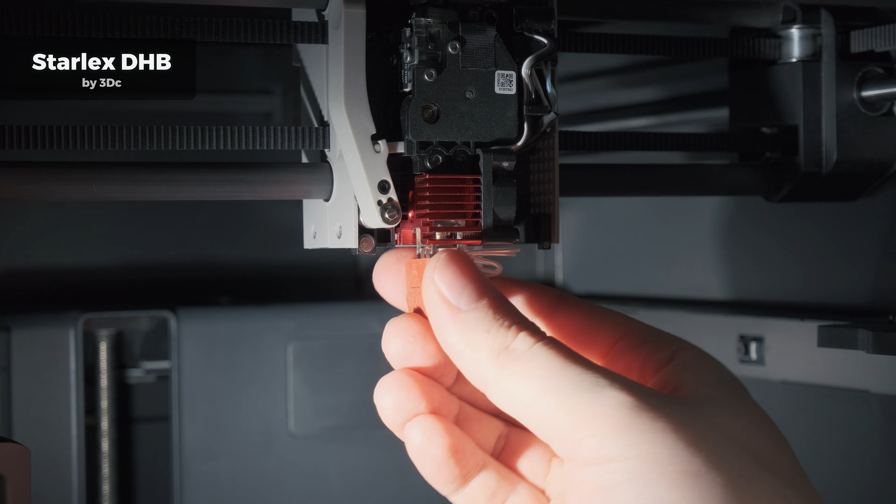Hot end designs for Bambu Lab X1 and P1 printers are getting absolutely ridiculous. They range from looking almost the same as the original but performing leaps and bounds better, to dual heaters and thin tubes that act as nozzles. The variety of engineering is truly spectacular.

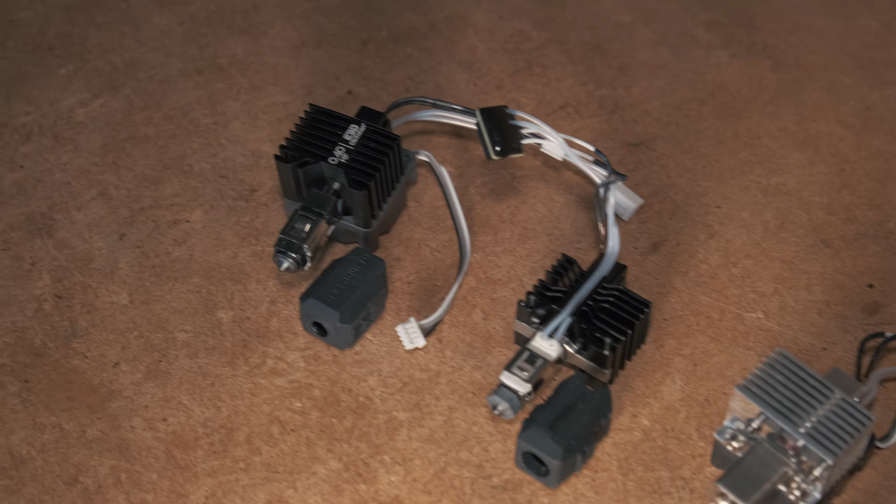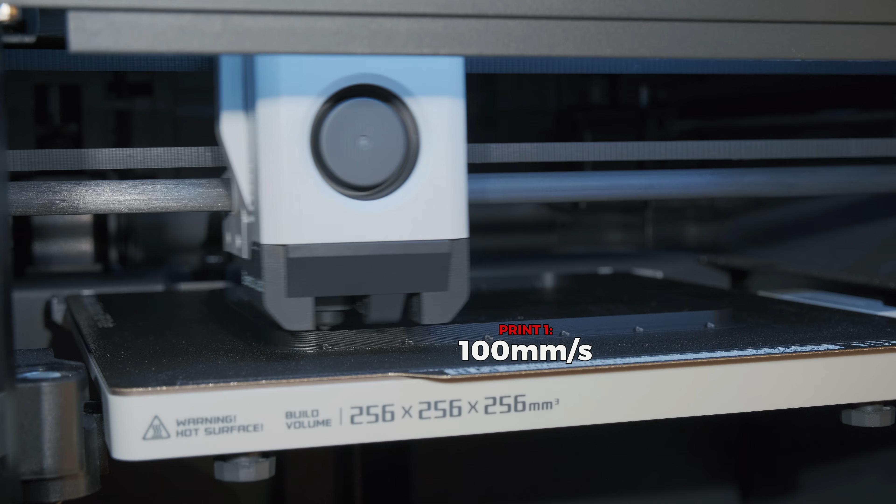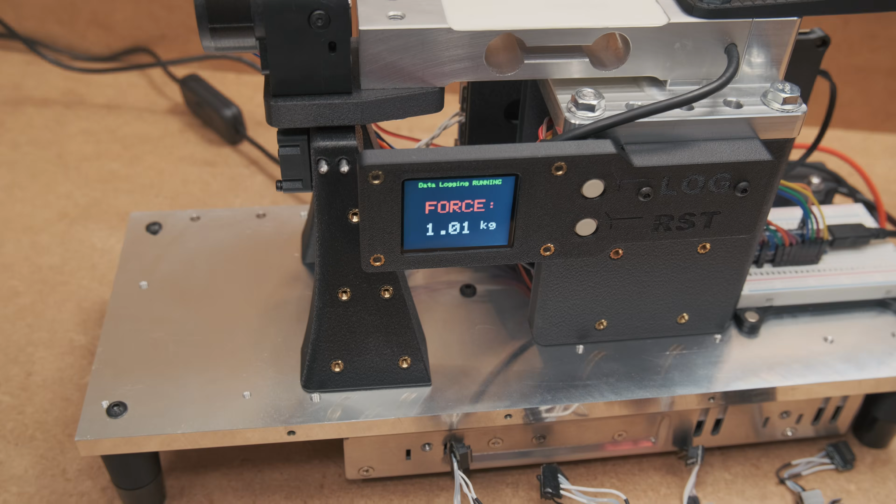The only question is, how well does each design perform for the main purpose of melting the filament? The proper way to determine that is not just by seeing if filament can be extruded, but rather by printing at increasing speeds and ripping samples apart to know how good the actual adhesion is. But this time I will go even deeper by additionally testing how much force each hot end needs to extrude the filament at those same printing speeds. There are so many fascinating things to look at and talk about, so let's dive straight into the good stuff.

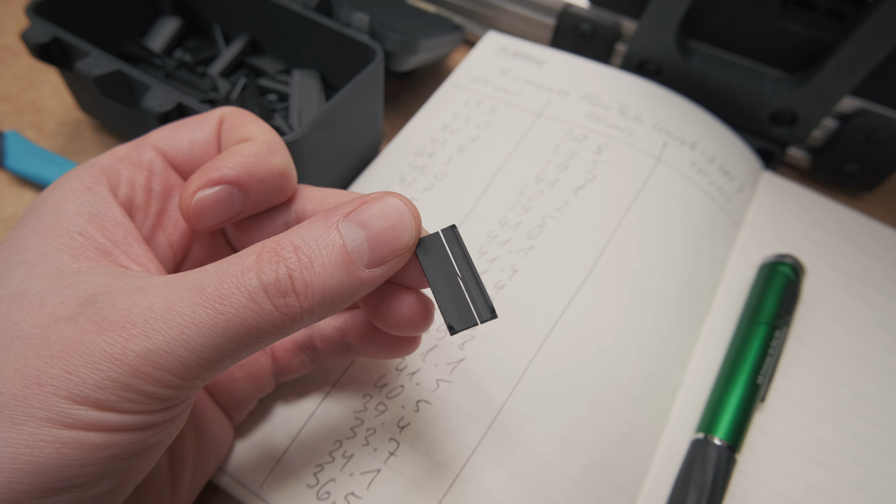We have so many hot end choices for P1 and X1 printers, but we get overwhelmed when trying to compare them. That is why I love this video series. It immensely helps us make a decision based on actual testing data. But it also creates a little competition between companies on who can engineer the best performing hot end when limited to this tiny form factor.

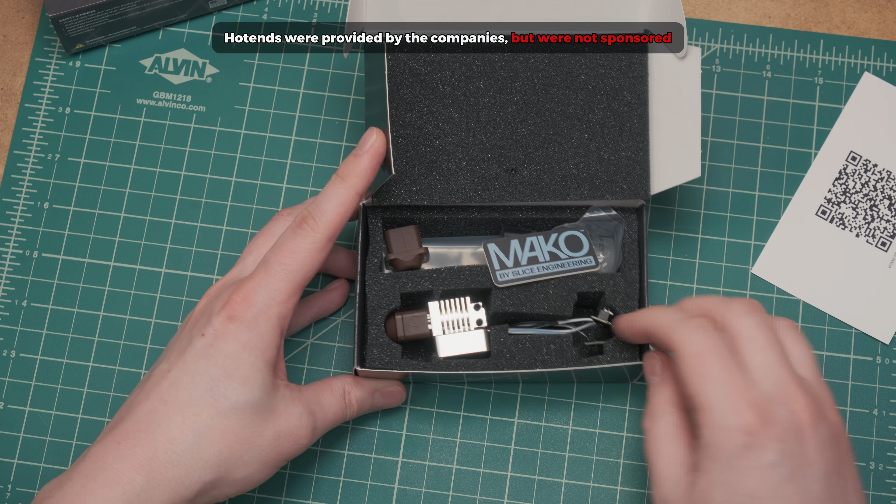We have a long-awaited Slice Engineering Mako, a very unique 3DC Starlex DHB, Micro Swiss's FlowTech, and the Phaetus Conch M6. Phaetus also released Conch hot ends for A1 series printers, but due to the sheer volume of testing needed, I had to exclude them from this video.

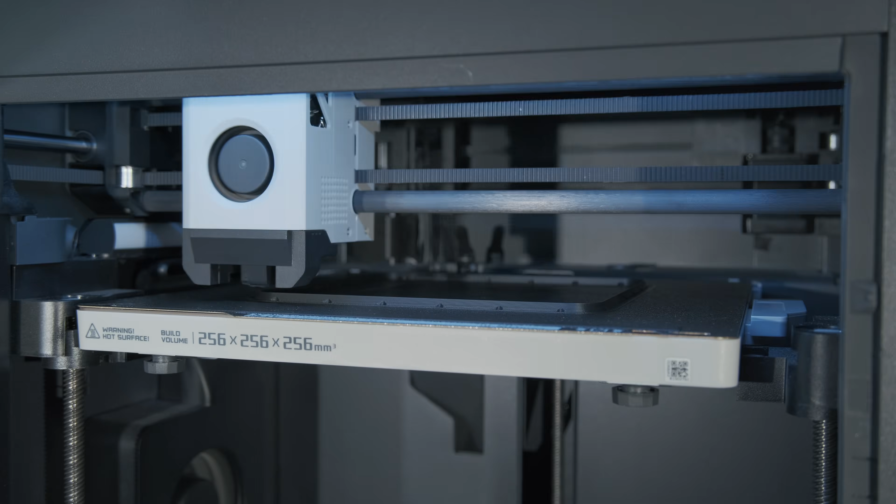It is important to establish a starting comparison point, so here is the stock Bambu Labs hot end's performance and the best performing hot end so far, the A4D High Flow ObXidian.

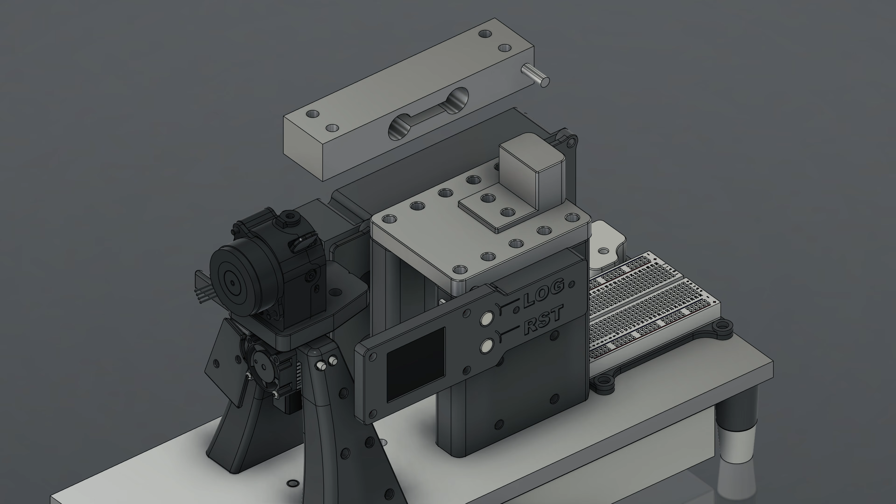Meanwhile, to additionally provide the extrusion force results, I had to build a custom testing machine. I won't go too deep into the details when making it, but the main goal is rigidity. That is why I designed and ordered a custom load cell bracket that was CNC'd from aluminum by today's video sponsor, PCBWay. Its main purpose is to spread the load from a smaller concentrated area to a bigger one that can be further printed.

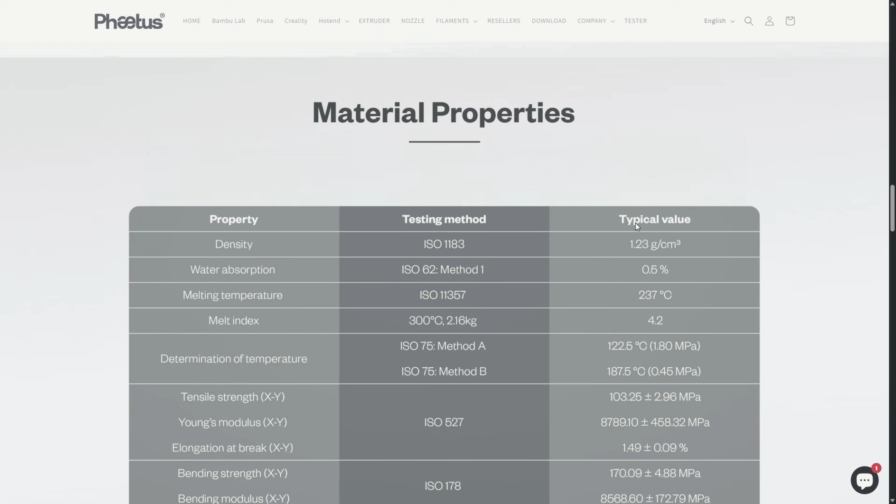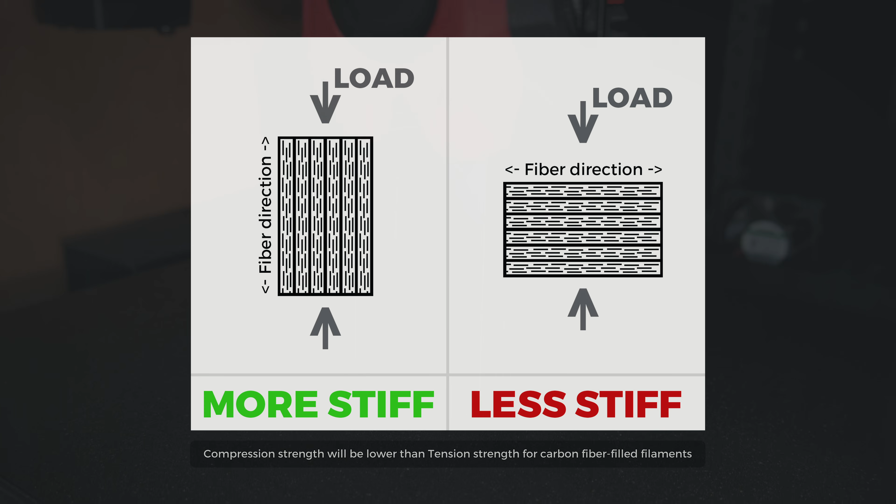For the parts, I chose Phaetus NextPA carbon fiber filled filament. It is based on PPA material, which offers incredible stiffness, and this one is also co-extruded, which should provide even more advantages. However, the key point is to orient your prints correctly, because that gives more than double the stiffness when fibers are aligned to the load direction.

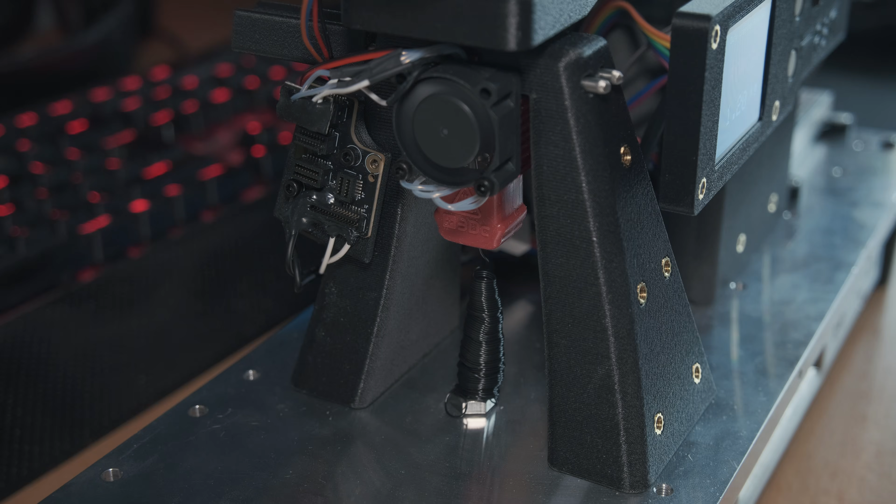The lower extrusion force is always better, as there will be less wear and tear on the extruder itself and less stress and deformation on the filament. Plus, for flexibles like TPU, having a hot end with low extrusion force technically means that you should be able to print it faster. So with all this out of the way, let's finally check the new hot ends.

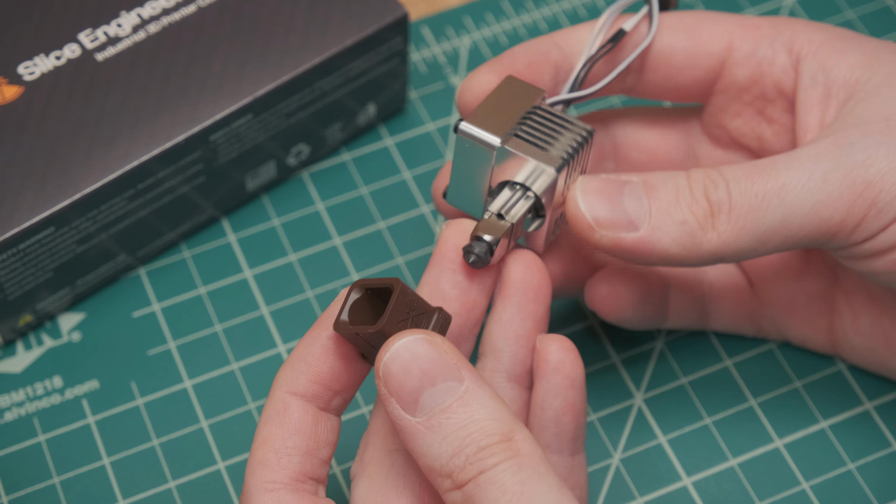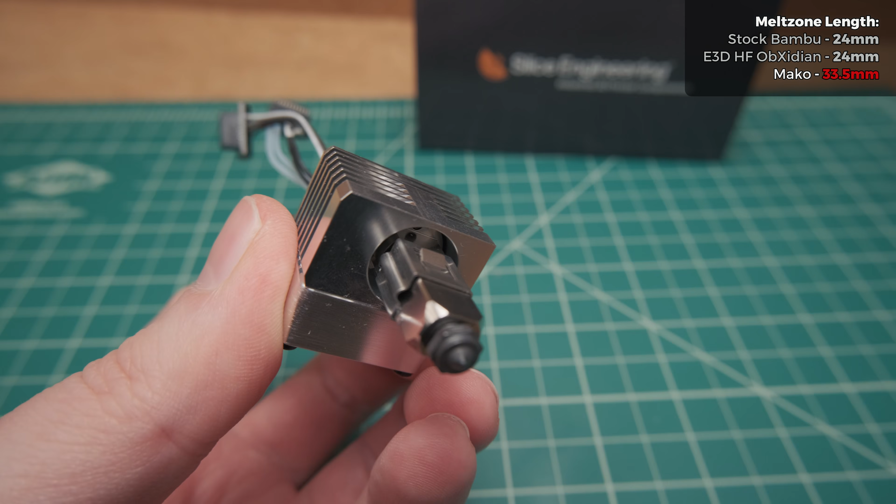First, the one we waited for quite a while, Mako with Gamma Master nozzle. The main thing that makes it visually stand out from the rest is the fan frame made from aluminum. That raises a question: why would we need one? My best explanation would be because this hot end has a long melt zone and it goes deep inside the heatsink with no thermal insulation or airflow from the fan.

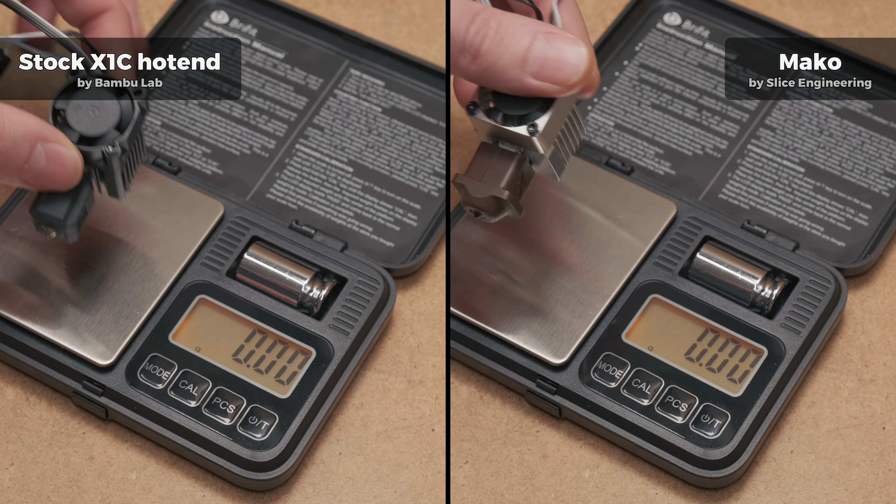The heatsink must dissipate way more heat, so basically the fan acts as an additional heatsink. It also adds up a significant amount of weight, and the Mako hot end ends up the heaviest I have tested so far. Plus, the fan makes quite a noticeable high-pitched noise, unlike the stock Bambu fan.

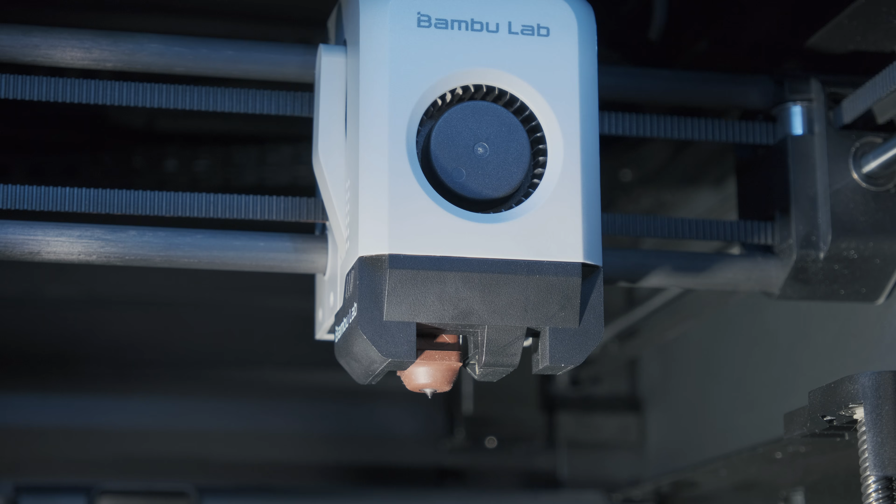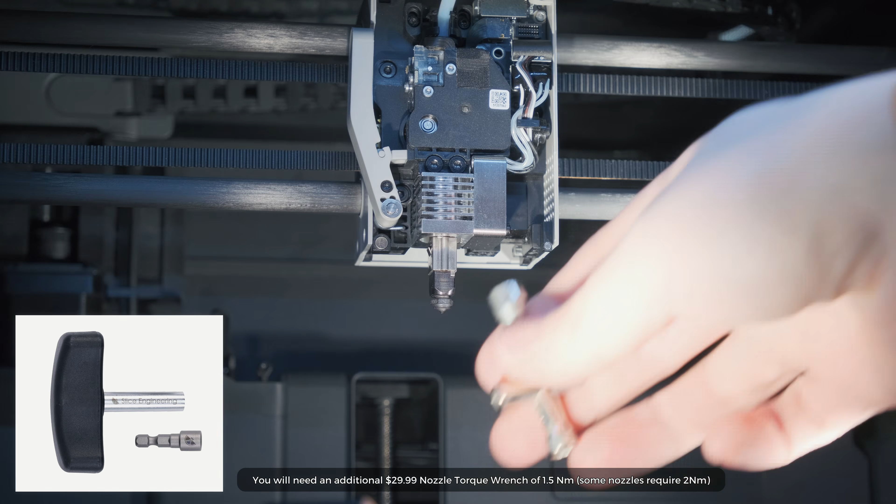Looking at the adhesion performance, I can say that it is very good compared to the stock Bambu hot end. It still falls short of the High Flow ObXidian, but the Mako hot end doesn't use CHT design on this nozzle, and nozzles are replaceable. Plus, it has hands down the most convenient and satisfying sock design that I have used so far.

However, having a way longer melt zone also means that we're pushing more plastic inside the heat block, and it requires significantly more force to extrude. I checked how much filament deforms at around the 2 kg force mark, and even with softer matte PLA I didn't see any issues. So these higher numbers are nothing to be concerned about, unless you mainly print TPU. This material is very squishy and would benefit the most from the low extrusion force.

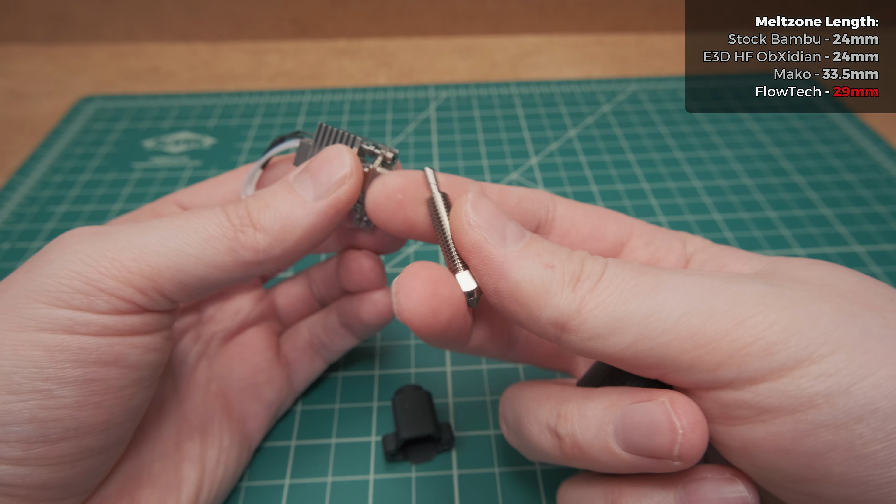Next we have a Microswiss FlowTech with CHT hardened tip nozzle. Unlike Mako, this one has the nozzle and the heat brick neatly integrated together, and you have to tighten it with a provided tool. But this is the first hot end where you can't replace the heater and thermistor yourself.

Considering that on the stock hot end you must be extra careful not to remove the clip that holds the heater when pulling the sock, this would be a nightmare on a hot end with switchable nozzles. So in this case, the sealed core design makes this process easier and worry-free.

However, the layer adhesion data of a Flowtech hot end with CHT nozzle was quite underwhelming, as it drops by 20% at higher speeds. The performance decrease is very linear, and extrusion force is one of the lowest at higher speeds, which is great, but it seems like we're bottlenecked by the thermal conductivity.

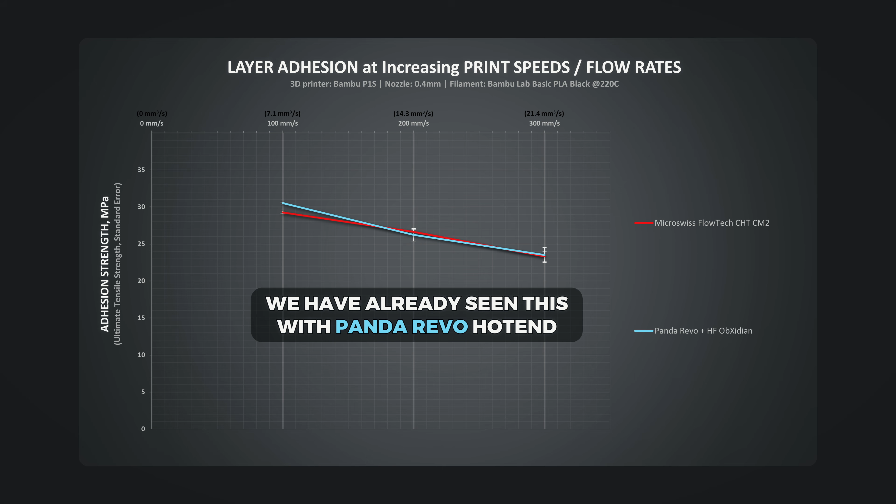To my best knowledge, this is because we're trying to heat a long nozzle using a short heat block that only makes contact on the threaded section, which also leaves many air gaps.

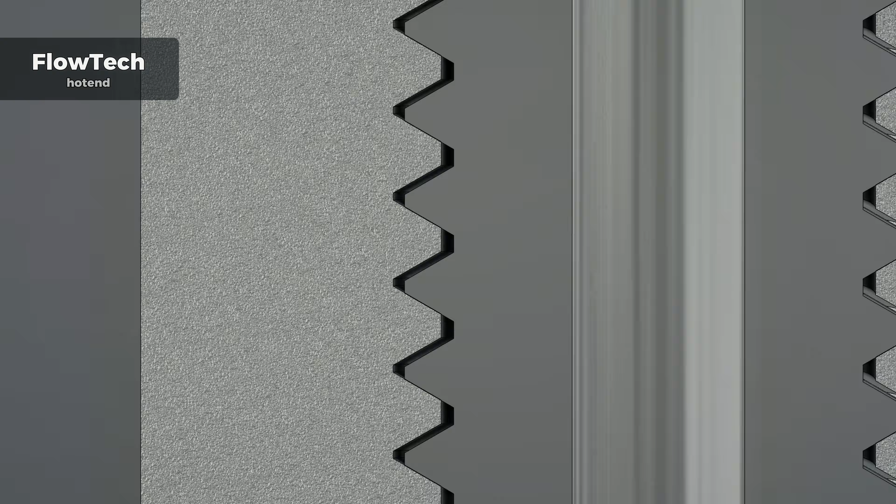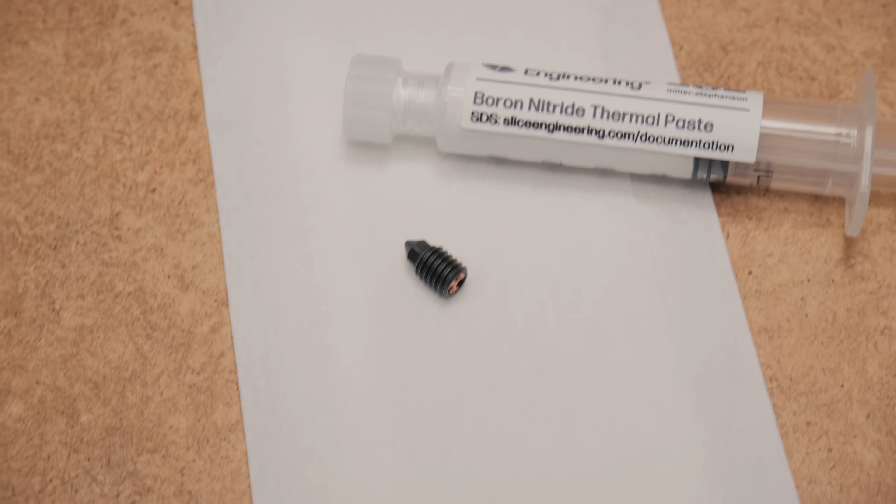This means lower thermal conductivity leads to PLA filament being heated at a lower temperature, which leads to worse layer adhesion. There's a reason why Volcano hot ends have nozzles fully seated into the heat block, as more contact area improves heat transfer. Plus, many of us use boron nitride paste to fill remaining air gaps, which further enhances thermal conductivity.

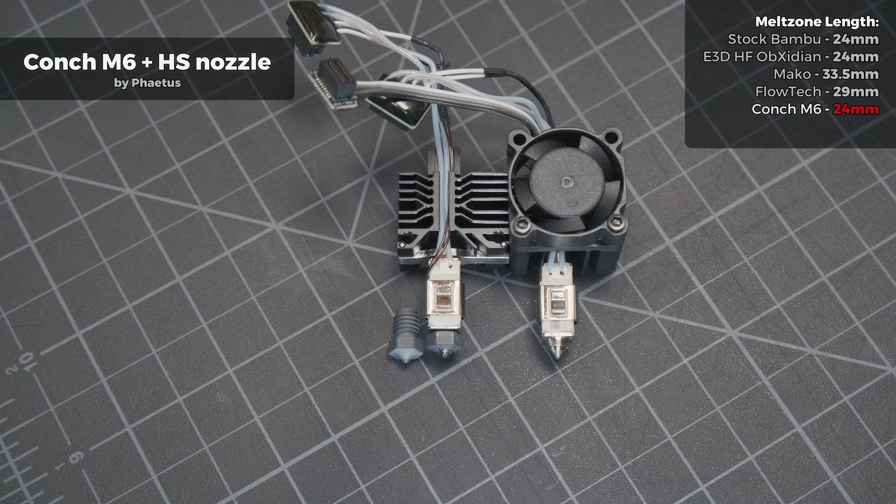A similar trend was with the Phaetus Conch M6. It has the identical melt zone length as the stock Bambu hot end, but because we're replacing a big portion of a heat block with a hardened steel V6 nozzle, we just can't expect better performance than the stock hot end.

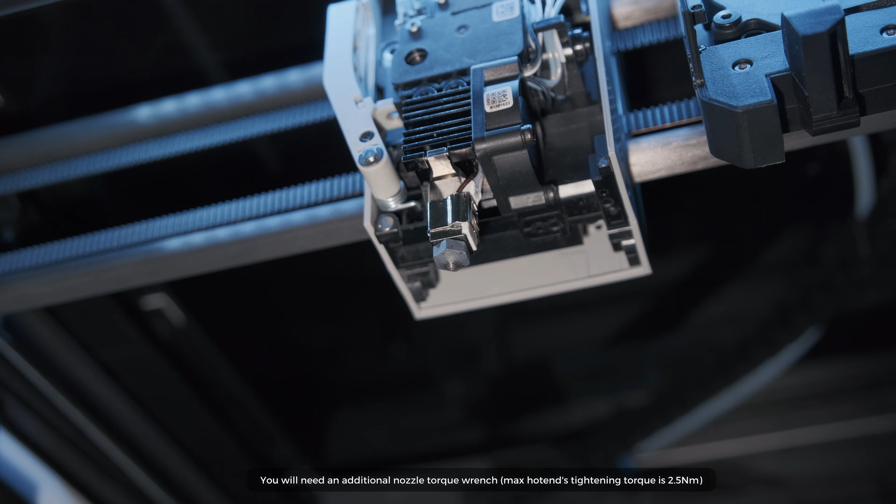But it is a budget-friendly hot end that was designed to allow us to use the most popular older V6 standard nozzles. Now we no longer need to do modifications, and I can really appreciate that. As the nozzle is the big portion of a melt zone, the performance will heavily depend on what type of nozzle you will be using.

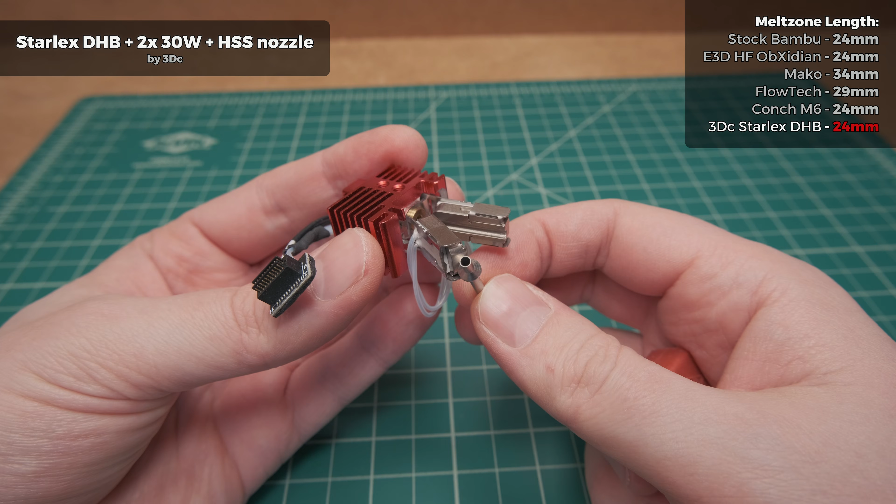And for the last, the most interesting hot end that we have seen so far, the 3DC Starlex DHB with two 30-watt heaters and a hardened stainless steel core that acts as a nozzle. It is a genius design where both heaters are pressed to the nozzle with a simple clip that sits inside the sock. Unfortunately, the layer adhesion was one of the lowest with this hot end.

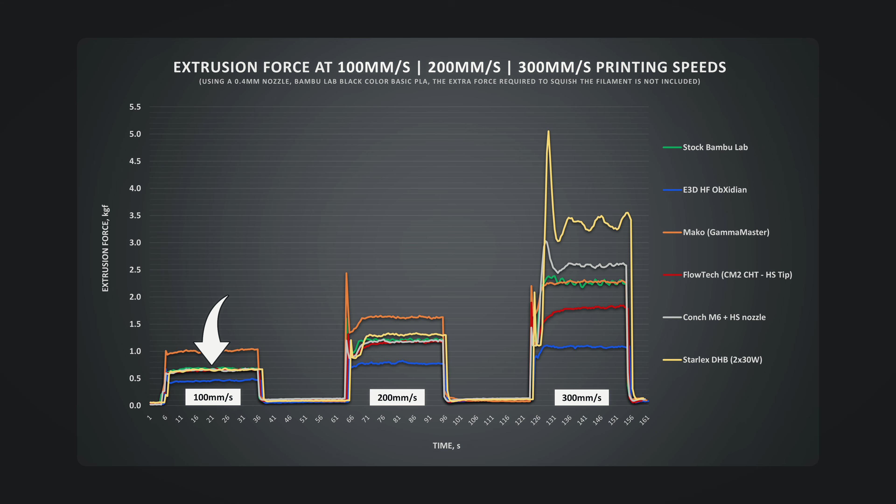This is where the extrusion force data becomes extremely valuable when analyzing the melting performance. Because the adhesion of a Starlex DHB was already low at slower speeds, but the extrusion force was on par with other hot ends, this means that the filament is just heated to a lower temperature from the start.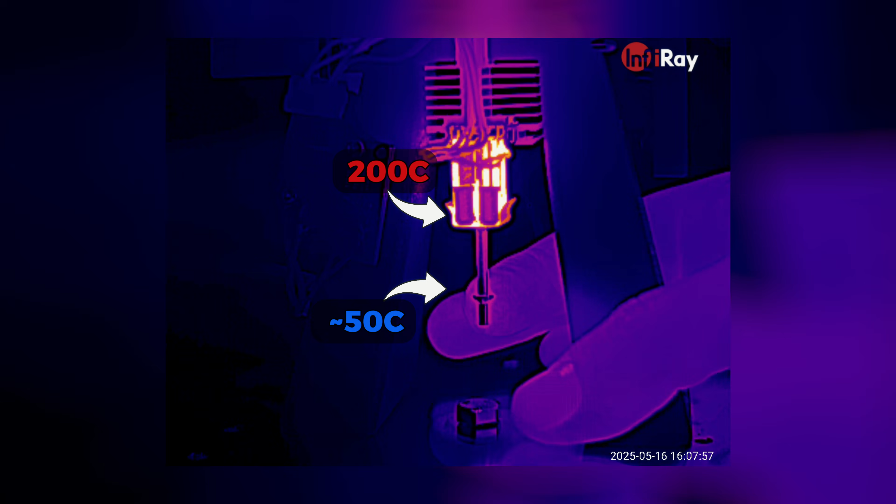And that makes sense, because we have a thermistor very close to the heater, and the hardened stainless steel nozzle is a poor thermal conductor. Starlex DHB has almost an identical performance curve compared to the stock Bambu hot end, so increasing the printing temperature by around 10 degrees should bring it closer to the stock hot end's performance.

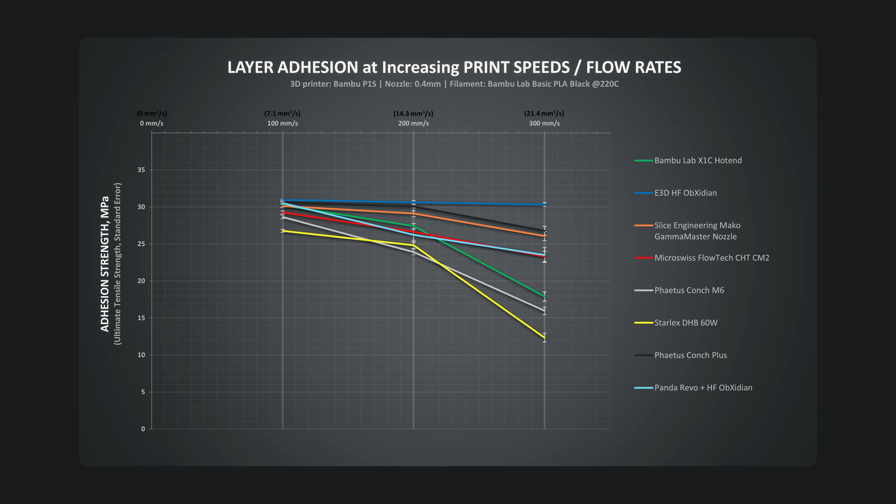Adding my previously tested hot ends, we can see an interesting trend. Aftermarket hot ends that have changeable nozzles just don't perform as well as hot ends that have integrated nozzle designs. The only exception is Mako, but that is mainly due to a very long melt zone and the nozzle being only a small portion of it.

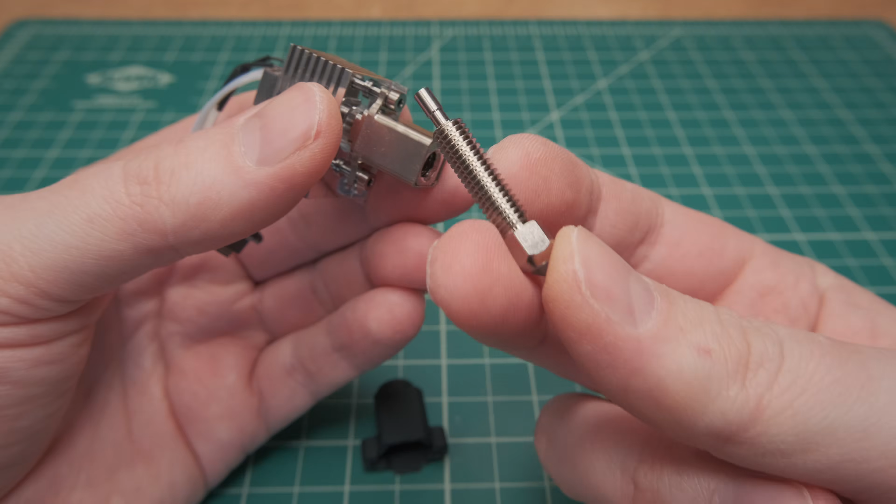We can also see that a genuine CHT flow rate increasing design can offer a significant reduction in extrusion force. The Flowtech hot end, despite having a 21% longer melt zone than the stock hot end, still provides a low needed extrusion force, and the results with the shorter E3D high flow ObXidian are even lower.

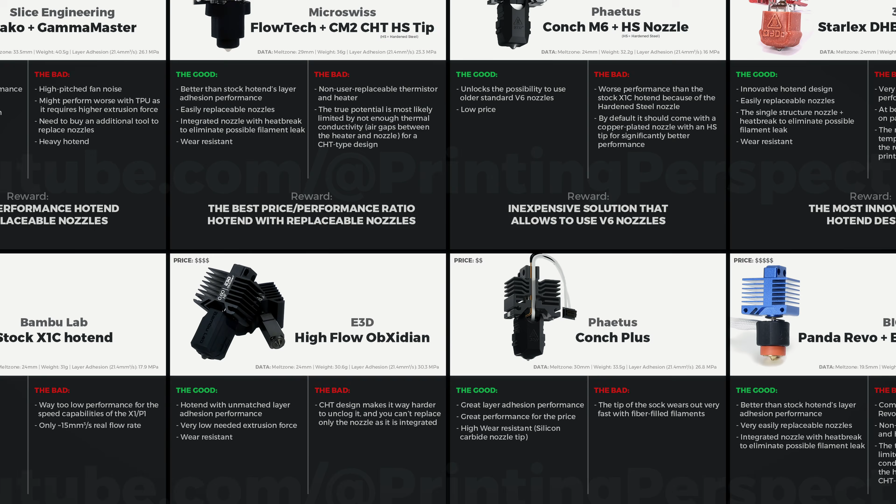As always, your hot end choice depends on what you want from it. Do you want easily changeable nozzles, or just pure performance? Hopefully this testing data will make it easier for you to make a decision.

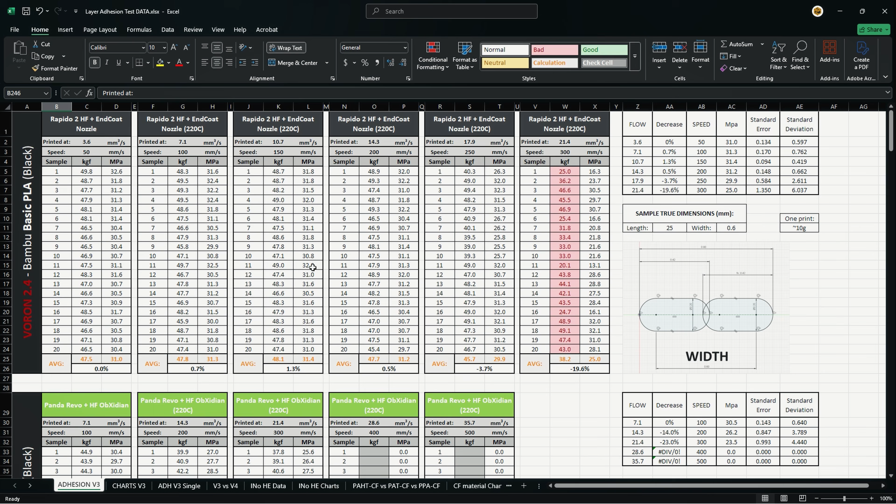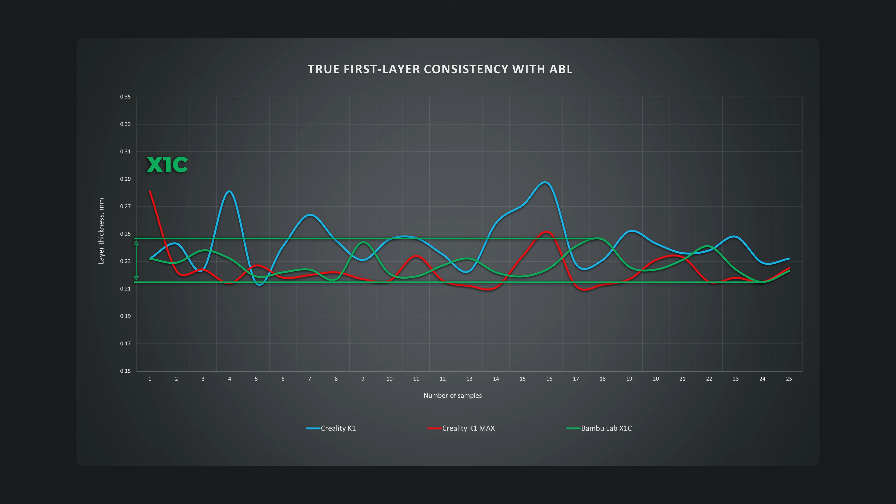I think we all as a community want more product reviews that are based on actual testing data. But when we expose the flaws and reveal the poor performance of products, a lot of companies don't like that. This is how my in-depth 3D printer testing series slowly died down, and that is the exact reason why I want this to be independent with your support.